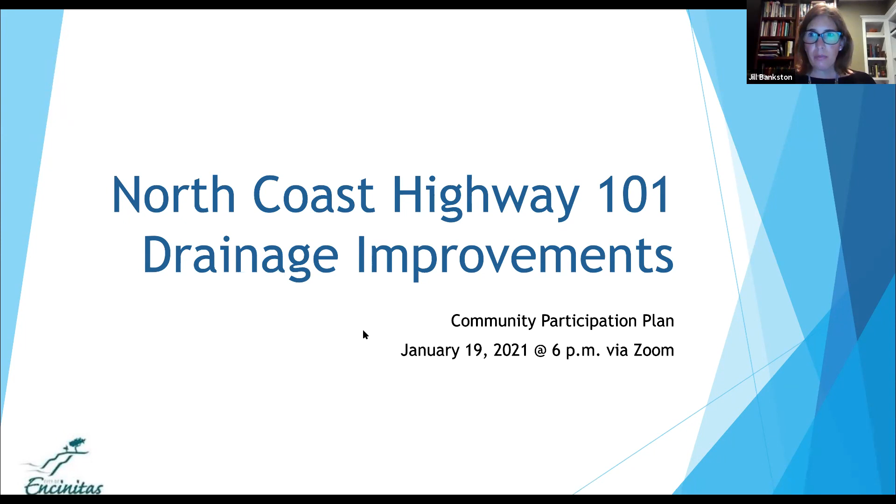So thank you everyone for coming to this virtual meeting for the North Coast Highway 101 Drainage Improvements Project. This is our community participation plan meeting for this project.

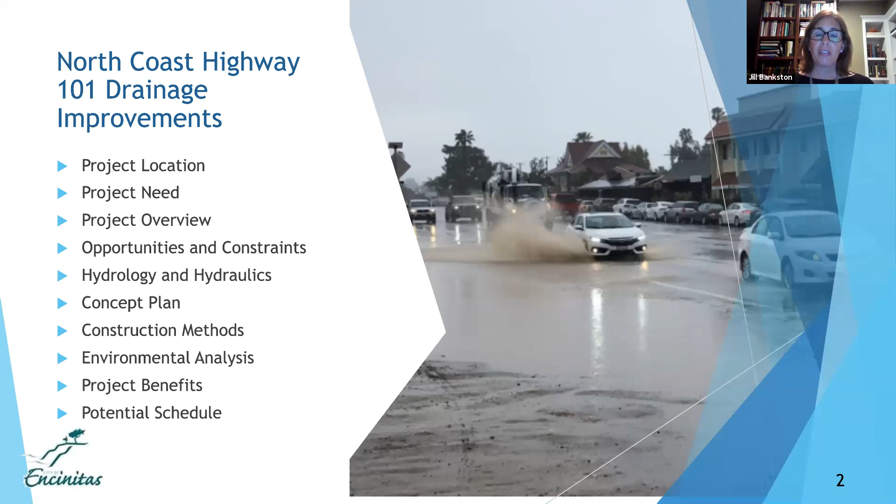So again, North Coast Highway 101 Drainage Improvements Project. These are the items we're going to cover tonight. We'll talk about the project location, the need for the project, an overview, opportunities and constraints, hydrology and hydraulics, concept plan, construction methods, environmental analysis, project benefits, and then a potential project schedule to move this forward.

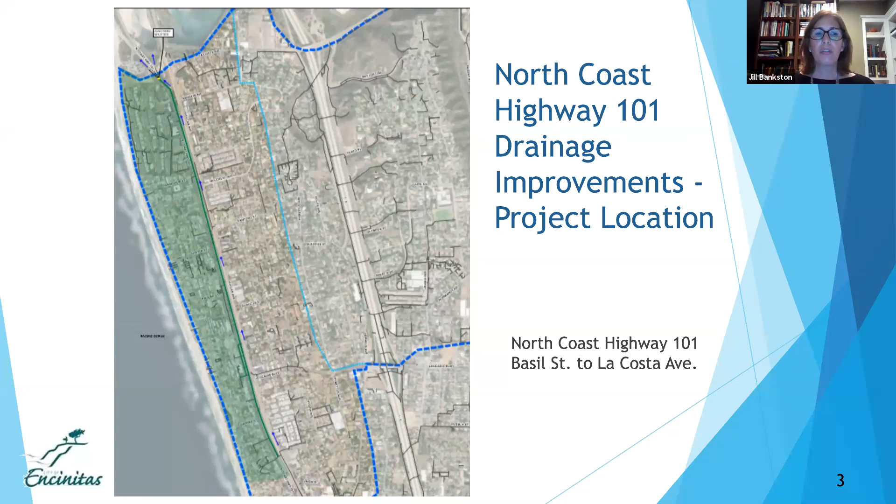So this is the north end of Leucadia. The green area you see shaded there represents all the area that drains to Highway 101 currently. So it is the area that is west of the NCTD tracks, south of La Costa, north of Basil Street.

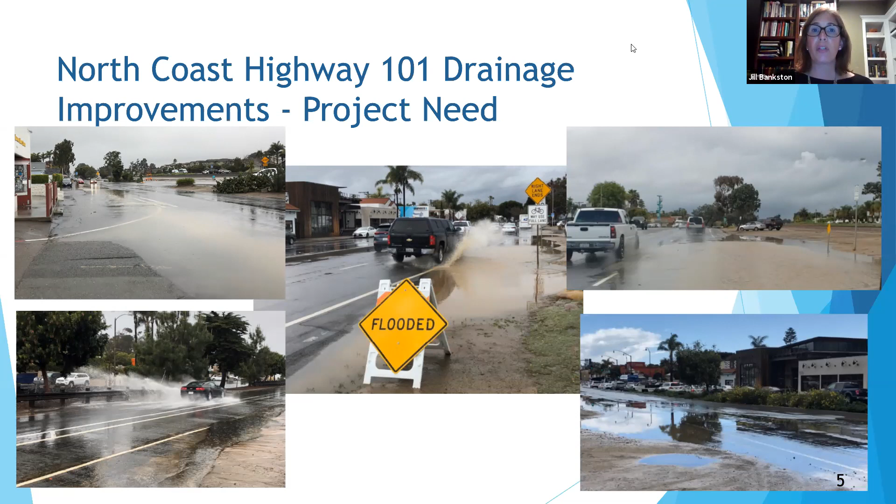So why do we need this project? If you're familiar with the 101, you drive the 101, you're familiar with what happens out there. During moderate or heavy rainstorms, we get ponding on the 101, which impacts the vehicular travelers, cyclists, pedestrians, residents, and the businesses in the area. So we're looking for a way to alleviate the flooding along the 101.

So then what is our project going to be? Between Basil and La Costa is approximately 1.5 miles. So we're looking to add 1.5 miles of new storm drain main line with additional inlets and connections along the way to gather the runoff that ponds currently at low spots throughout that corridor. We'll create larger inlets to get the runoff off the roadway quickly. New inlets at Leucadia Roadside Park, where we have a big ponding problem during most rain events.

And we'll be adding Green Street improvements to improve water quality. The inlets that are in the 101 currently are decades old. They don't have any best management practices for stormwater. So this will be an improvement to the water quality in this area as well. And then we're not going to change the existing pipe outfalls. All of this water currently drains to the north through existing pipes, and we're going to keep those pipe outlets the same.

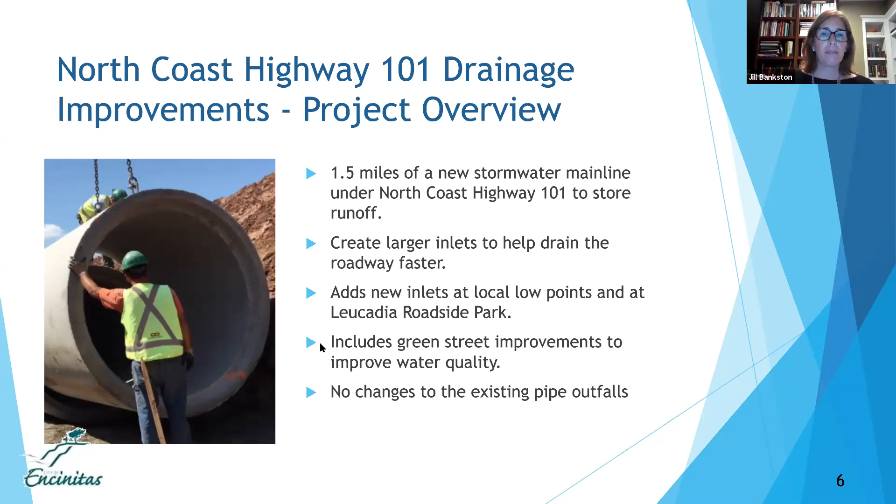So when undertaking this project, we wanted to look at the opportunities and constraints or challenges for this project. We see an opportunity to reduce flooding along the 101, to add new stormwater treatment to the runoff. An opportunity is that the project is entirely within city right-of-way. We don't need to get any new easements or right-of-way to construct this project. And the new hotel project just built an energy dissipator for stormwater runoff at the north end of the project. So we'll be able to use that new facility in conjunction with this project.

And then what are the constraints for the project? We have existing underground utilities, and we need to understand their location and make sure that our alignment doesn't impact them or figure out where they need to be relocated. There's traffic. Our intent, of course, is to construct this drainage in the highway, so there will be impacts to traffic as the project is constructed. And along with any construction project on the 101, there will be impacts to the businesses and residents. But our hope is that the short-term impact will have a long-term benefit as we address the flooding there.

The pipe will be relatively deep, 25 feet or so at its very deepest. So that presents some challenges, particularly with groundwater. When you're digging that deep, you may have kind of a wet excavation, which makes it more challenging. And there might be sandy soil, which is also challenging to excavate in.

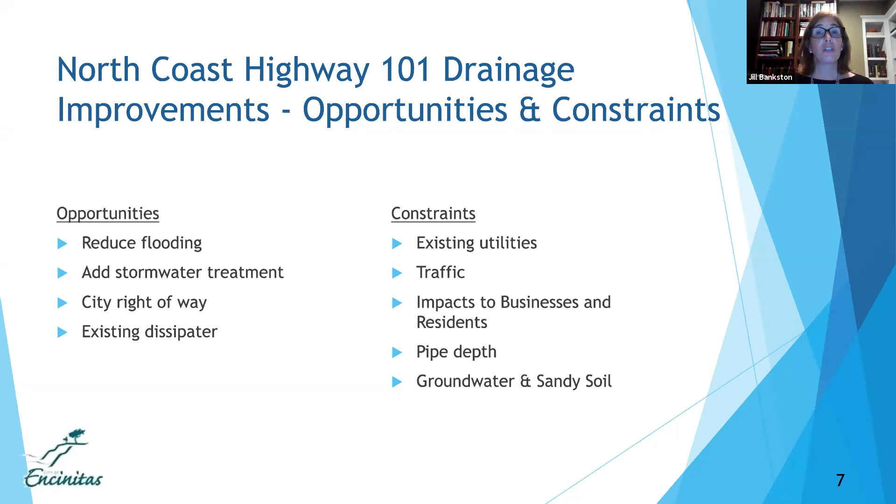So what did we do to figure out how to size the pipes in the area? So first we had to look at hydrology. And hydrology is basically trying to understand how much water is coming into the area that we need to capture. So as I mentioned before, and I showed in a previous slide, that green highlighted area is about 200 acres. So that's the tributary area. All the rain that falls in that green polygon flows down to the 101 and needs to be captured.

Next, we look at intensity, duration, and frequency curves. So looking at what is the intensity of a storm that we expect to get in this area. Duration, how long do we expect it to rain that hard? And frequency, are we looking to address a storm that would happen once a year, once every 15 years, once every 25 years, once every 100 years? And then finally, by combining that information, we're able to calculate the runoff volume that we need to capture and get off the roadway.

So now that we have our volume of water that we need to capture, then we went into our hydraulic design, which is figuring out what pipe sizes we needed in order to convey the water off of the 101 and outlet it. So as I mentioned before, we're not going to have any changes to the outfalls. What we're going to do is provide big new pipes under the 101, and they range in diameter from 36 inches all the way up to 66 inches.

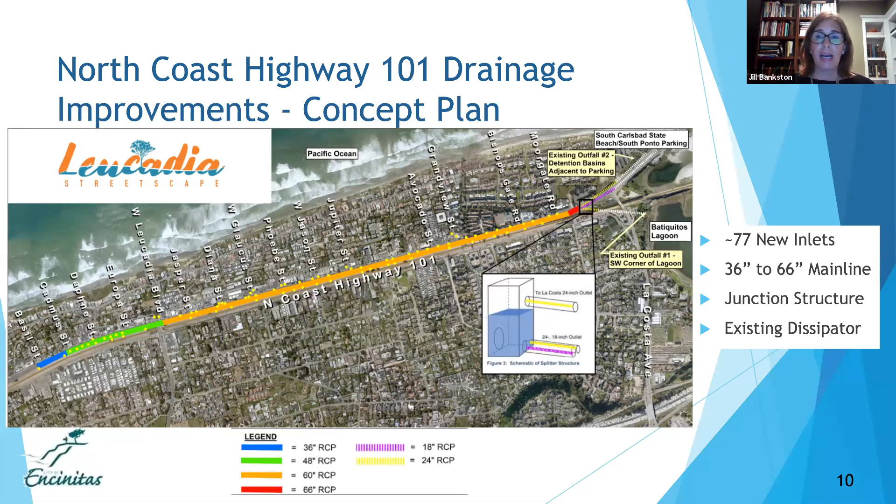And then the little inset that you see here is a junction structure where we have some pipes coming together and then outletting in different directions. So it splits the outlet so that the smaller storms with not that much water, those all go to the west towards Ponto Beach. And then when we have very large storms, that junction structure will fill up with water and it may outlet to the east side of the 101.

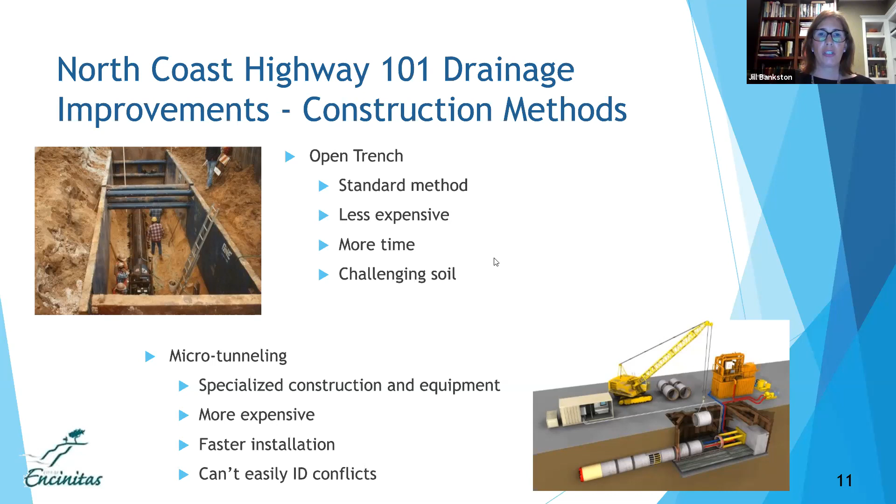So after we set our alignment and our inlets and our pipe, we did an initial environmental analysis of the alignment. So we looked at biology, water quality, and paleontology.

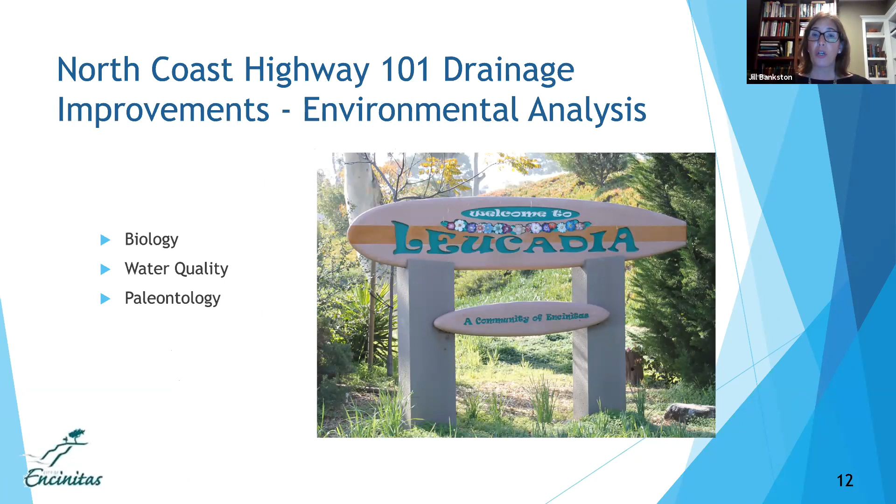So for biology, we identified the existing biological resources. We looked at birds and plants and fish and any kind of species that may be out there, including listed species or species of particular concern. And then we reviewed the potential impacts to any of the biological resources out there.

We looked to see if there could be concerns with erosion stemming from these new pipes, dilution or salinity depression in the outlet areas, new sedimentation or pollutant load. And after analyzing and reviewing those 4 factors, we found that our current design does not have an adverse impact on biological resources.

Next, we looked at water quality. So we took a look at the pre and post-project conditions, and then we evaluated potential impacts to water bodies, surface water, wetlands. This project was designed to meet the Regional Water Quality Control Board's standards and requirements. So by adhering to those standards, our design does not have any adverse impacts on water quality.

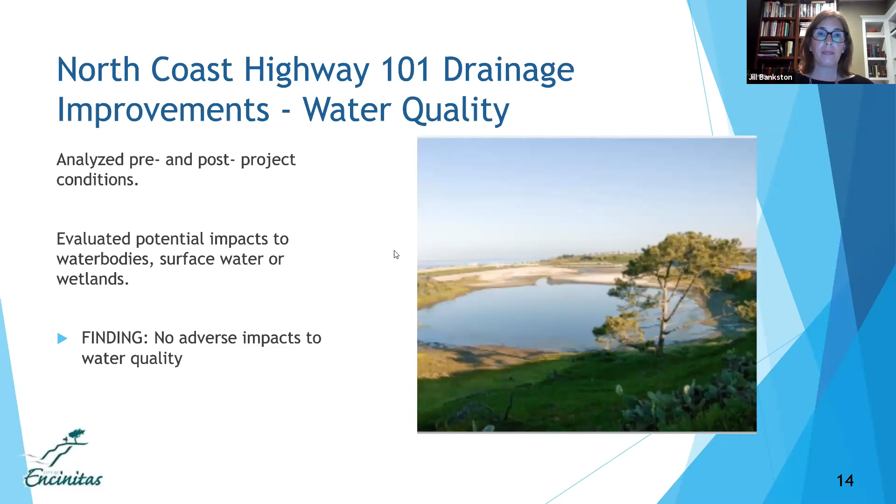Next, we looked at the paleontology of the area. So we identified the geological units that may be impacted. So there's a Bay Point formation that will impact through at least probably half of the project from the midpoint north. And then in the very deepest parts, we may also impact the Santiago formation, which underlies the Bay Point formation. So in our very deepest excavations, we may encounter those formations.

So what we found is we'll need to have a paleontological monitor on site when we're excavating in those areas. So those folks will be reviewing the excavation, looking to see if there are any artifacts that are uncovered. If there are, then they will salvage, clean, catalog, and donate those artifacts. And then at the end of the project, they'll do a paleontological report summarizing their findings.

Next, project benefits. So we wanted to see the benefits that we would have if we address and reduce the flooding. So we'll have benefits to the vehicles that are traveling the 101, cyclists along the 101, pedestrians along the 101, and then of course the businesses and residents along the 101. It will benefit all those user groups.

By adding new best management practices and stormwater amenities, we're going to reduce our pollutant load over what we're doing now by having more biofiltration, dispersion, and landscaping to filter out some of those pollutants that right now are just going right into the storm drain system.

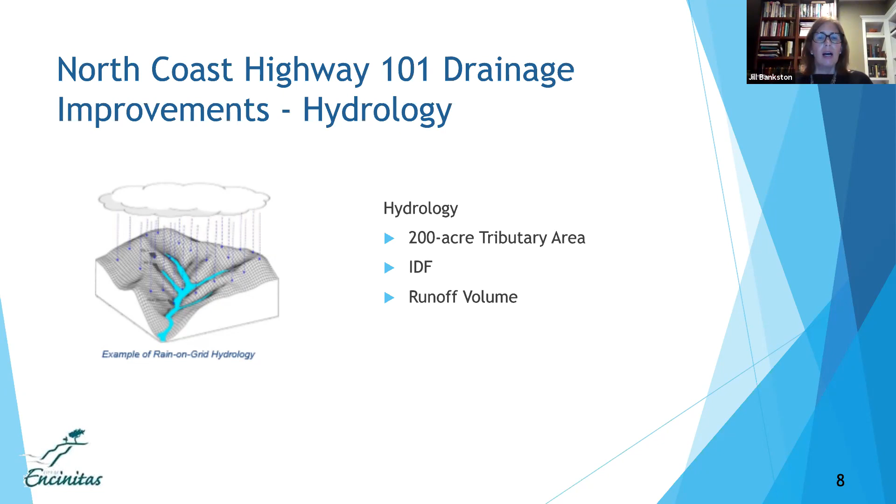So one of the water quality studies we did looked at sedimentation and whether we expect to see an increase. And our calculations, because of the fact that right now there are no best management practices on our existing pipe system, and right now we have a lot more paved area. In the future condition, once we have streetscape, we'll have less paved area, more landscape areas, more dispersion areas, and more best management practices. Our study calculated what we think the impacts will be, and it was a de minimis finding, so a negligible increase that would not impact the water quality of the area.

Okay. Follow-up question from Diana. Are there design opportunities to future-proof the system to allow for future connection for drainage solutions along Vulcan Avenue? So Vulcan Avenue is a separate tributary area. As I mentioned before, the city has other projects that are in the hopper that are looking at drainage in other areas, including Vulcan. But that's a separate project, and that will have a separate community input meeting when that one comes forward. Thank you.

And then a question from Paul. After implementation, how often will 101 flood? So that depends on how big the rain events are that come. This system by itself is intended to address a storm event that occurs once every 25 years. When future drainage projects come along, the overall area may be outfitted for larger storm events, but this project in particular will address up to a storm event so large that we'd see it only once every 25 years.

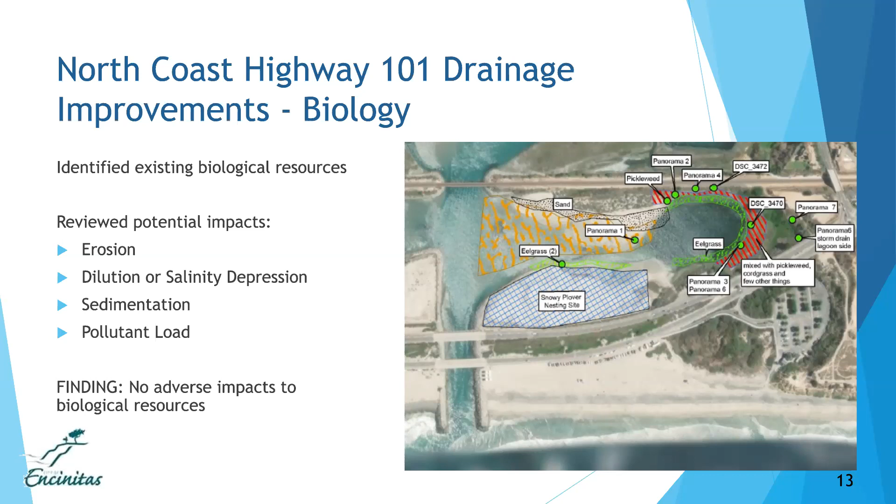Okay. Question from Tim. If traffic is impacted, where will delivery trucks park? Alleys where people live are already affected by deliveries. We often get stuck in our own driveways. Yeah, so this project will be constructed as part of Streetscape. So the Streetscape project will be adding new reverse angle parking and parallel parking along the corridor. And then during construction, we will require the contractor to make sure that there is continuous access to all the residents and businesses that would be impacted by the project.

Perfect. And then a question from Dar. If you know it could start in summer 2021, do you have an estimate approximately of the total time to complete this part of the streetscape, the overall timeline just for this scope? So this scope is meant to be constructed along with other streetscape projects. We wouldn't want to impact the 101 and all the vehicles along the 101 and the neighbors twice. So this will more likely than not be mixed into another Leucadia streetscape phase, and we just don't know the size of that next phase and how long it would take to construct. I would guess it would be at least a year and a half, maybe 2 years for the next phase.

And again, we need to wait for City Council to make their priorities known and to fund the projects that they believe will bring the most benefit to the community. So construction is not funded yet. We'll wait to see if it gets funded for next year.

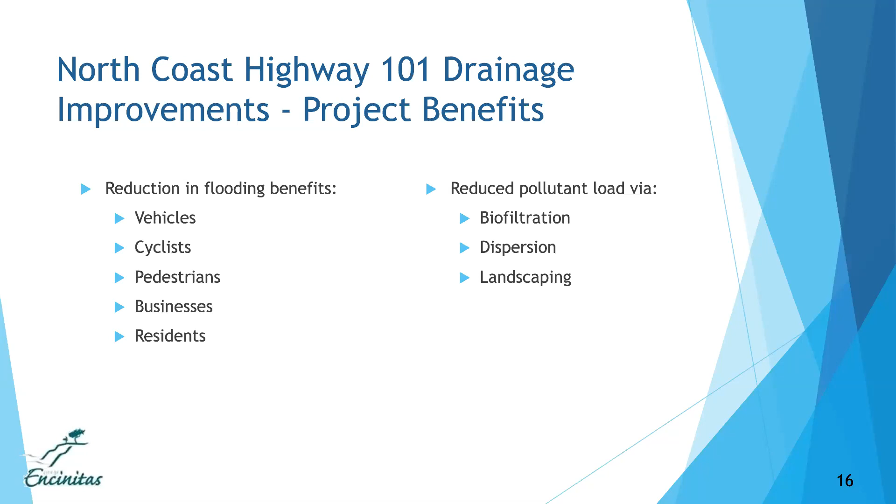Okay, we have a question from Dar. What will be the impact to digging, the depth, and also to the bluff? No impact to the bluff. So all the digging will occur within the 101 corridor or those adjacent side streets that tie directly to the 101. We have some geologic formations that we expect to encounter in the project, but we'll have appropriate paleontological monitoring to watch the excavation and to alert us if any resources are found and handle them appropriately.

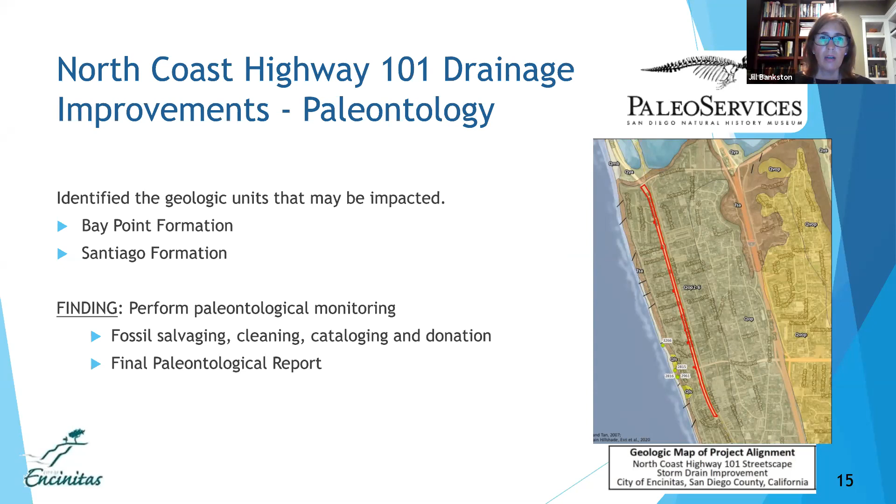Okay, follow-up question from John. Are you drawing a distinction between Ponto outfalls and Batiquitos Lagoon outfalls? We are. I don't know, Bob, if you want to talk a little bit more about that. Let me see if I can find the slide I'm thinking of with the junction structure. Yeah, I would actually defer to Joanne for the different outfalls and how they work.

Yeah, hi. Sorry, I was trying to make sure I was unmuted.

Thank you. Dara's question, was there any consideration to keep Leucadia funky in discussions regarding this project and streetscape? Sorry, can you repeat that, Andrew? Sure. Was there any consideration to keeping Leucadia funky in discussions regarding this project and streetscape?

So this project is just a storm drain. It's underground. The only thing that you'll see at the ground level will be drainage inlets. So we didn't see much opportunity for funkiness in the stormwater design. But throughout the Leucadia streetscape design, yes, we did look at areas to incorporate art and to incorporate some of the more fun elements into this roadway design.